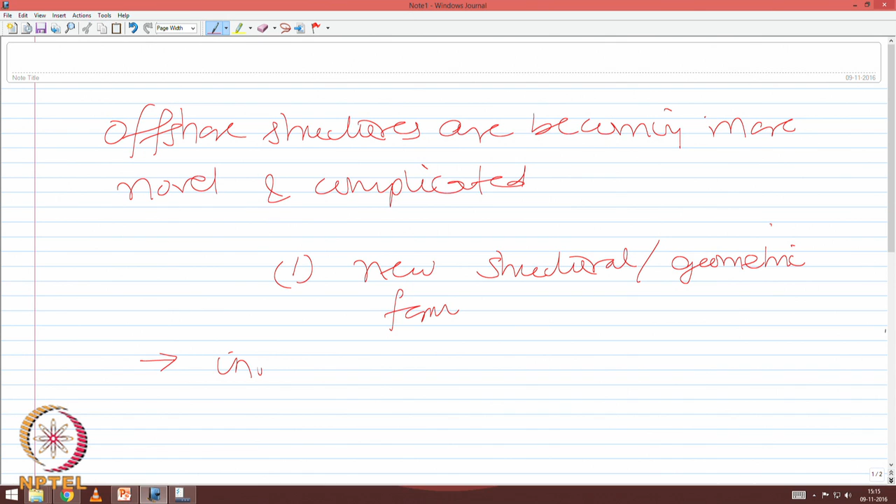One may ask, why should offshore structures have new and innovative geometric form? The answer is simple: innovative structural form is required to make it more adaptive to loads.

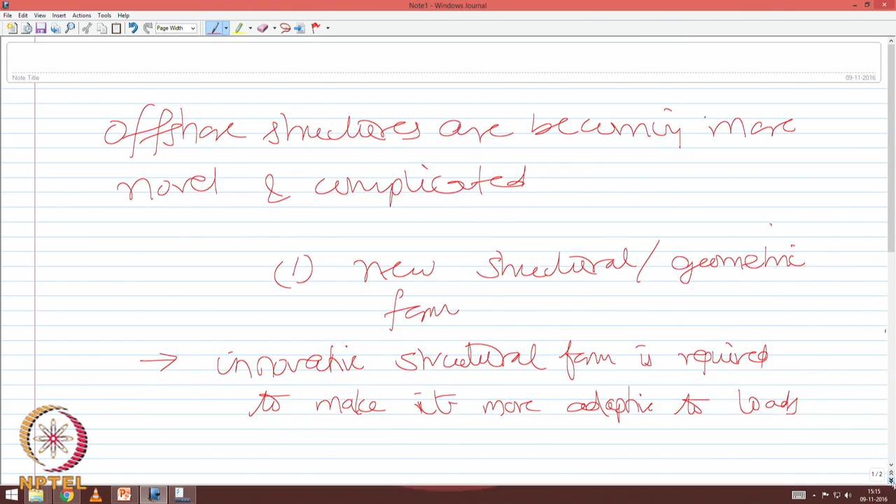The primary focus in the whole discussion is how to reduce the response of the given structural system under various environmental loads. So the primary objective of innovative structural form is to reduce the response under the environmental loads.

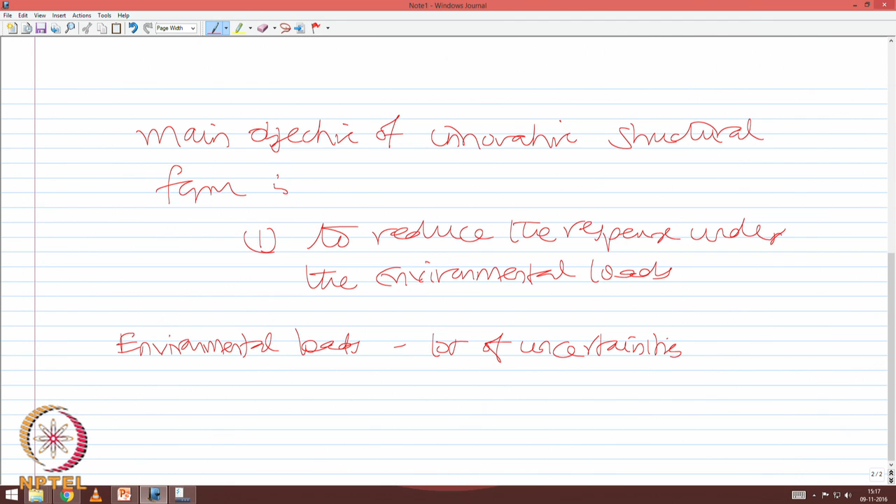However, if you look at the environmental loads in total, which we will be discussing in detail, they have lots of uncertainties, in the sense of uncertainty in estimating them, and uncertainty in estimating their direction of approach.

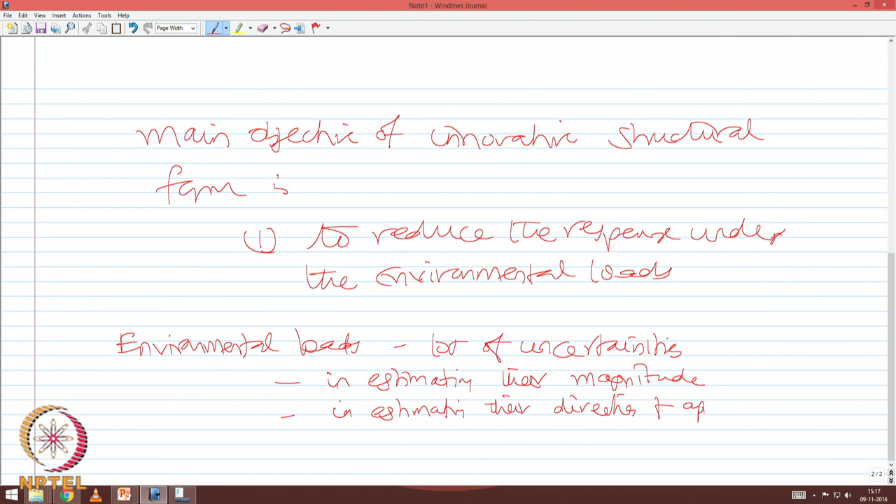Most importantly, the return period of these loads makes them very complex.

However, we are not interested in explaining the complexities of conventional environmental loads like wave load, wind load, ice load, etc. There are different courses and materials available in the literature which explain these complexities to readers.

So I do not call these forces special loads. Therefore, in this course we will not discuss much about wave load, wind load, etc. in detail. However, we will talk about special loads encountering offshore structures which are not otherwise discussed in conventional literature.

One may ask, what would be the result of encountering special loads on offshore structures? When special loads are encountered on offshore structures, it leaves a complex behavior in their response.

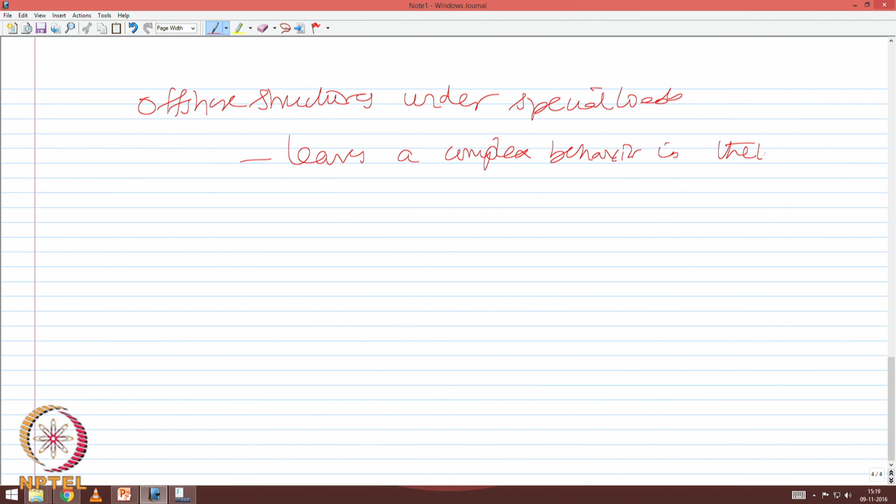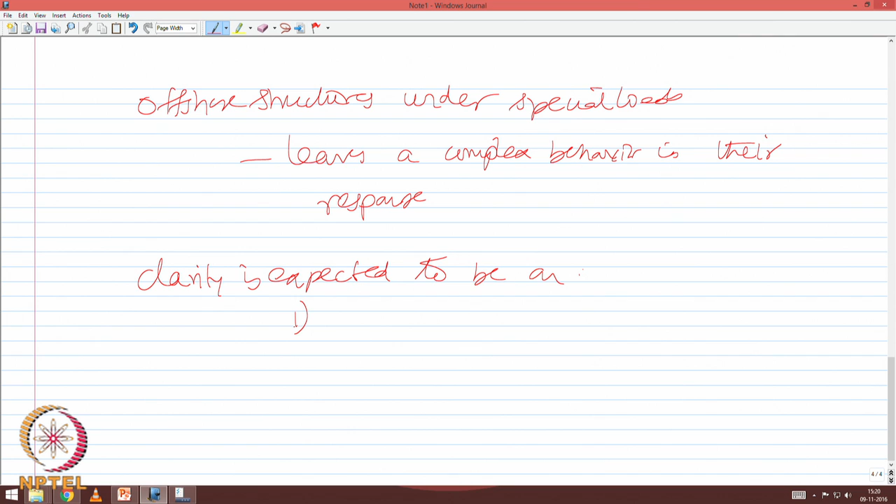Therefore, this course is expected to improve the clarity of understanding in estimating not only these special loads, but also the response behavior of offshore structures under them. So clarity is expected on: 1, estimating these special loads; 2, understanding the response behavior of offshore structures under these special loads.

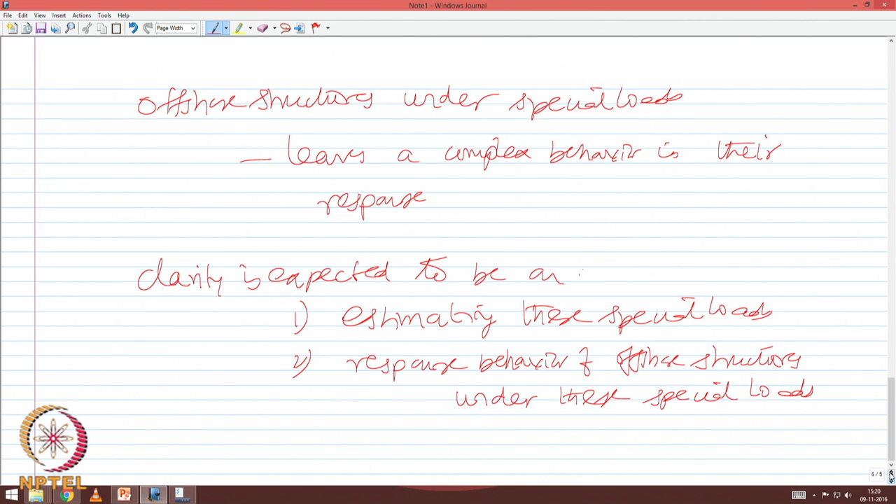Let us see what would be the course objective for this course titled Offshore Structures under Special Loads including Fire Resistance. So what are going to be the objectives of this course?

We all agree that offshore structures are unique in nature. The uniqueness comes from two sources: 1, the geometric form; 2, their special functions.

Sometimes offshore structures are also designed for special categories of functional operations. We will talk about these new generation offshore platforms, whereas the functional application is completely redefined depending upon present requirements. So offshore structures are unique from two sources: innovative geometric form and special functional operations.

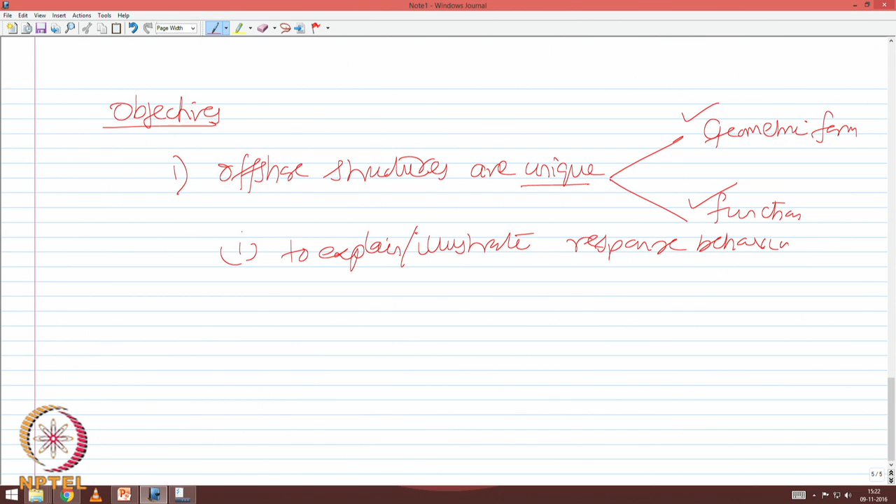Therefore, the main objective of this course should be to explain or illustrate the response behavior of offshore structures under these special loads. While doing so, we will give special focus to fire resistance design.

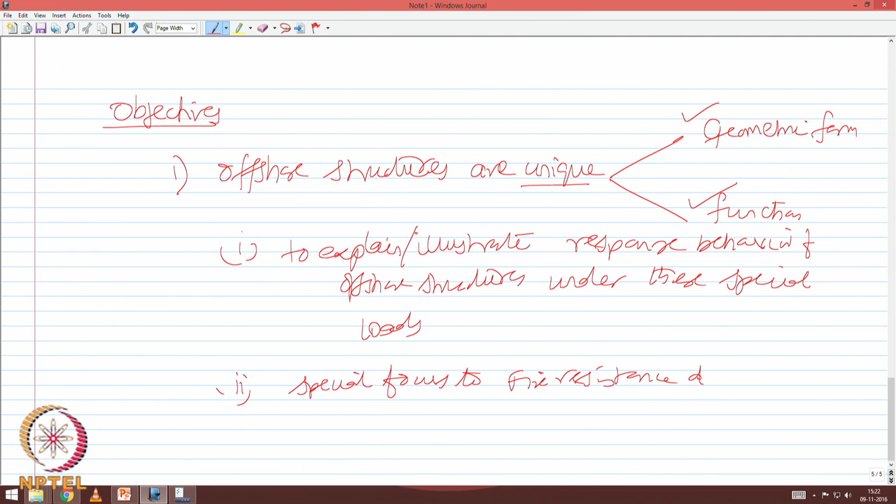One may ask why fire resistance design is given special focus in offshore structures. Looking at the history of offshore accidents, which are highly unintentional but highly severe in consequence, one is interested to know what special care must be used to select material with good fire resistance, to mathematically model fire on this material, and to understand the consequence of spread of fire and explosion in terms of asset management of offshore structures. This could have been a primary focus about 10 years back, but even now it is very important that fire resistant design is inevitable for offshore structures, because the asset involved in damages caused by fire is huge in scale.

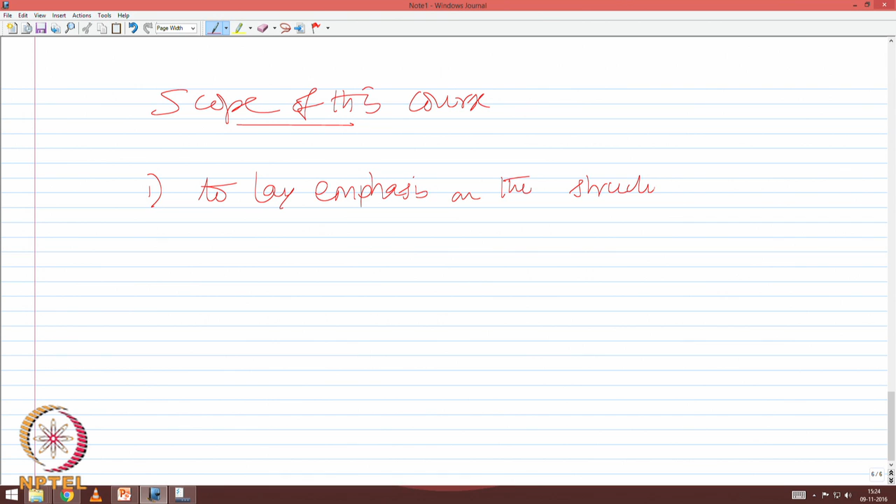The scope of this present course is to lay emphasis on the structural action of offshore structures under these special loads.

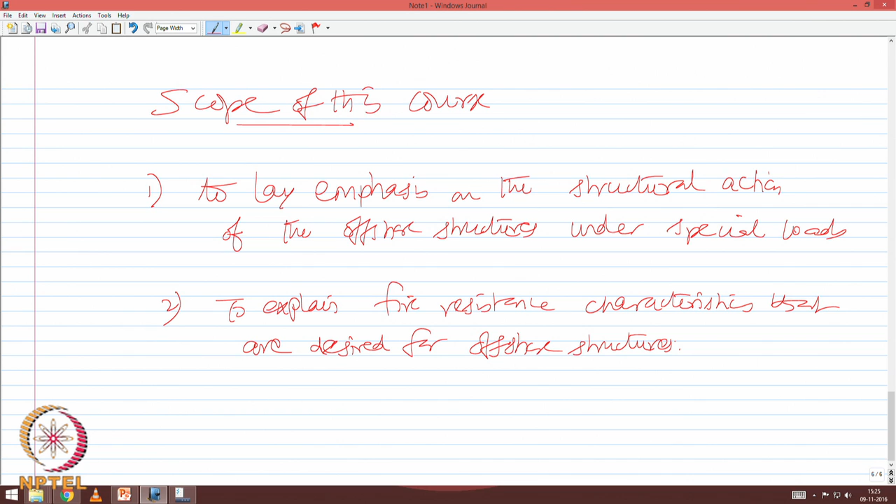The second scope should be to explain the fire resistance characteristics that are desired for offshore structures, because there are unique challenges in design when these structures are subjected to fire.

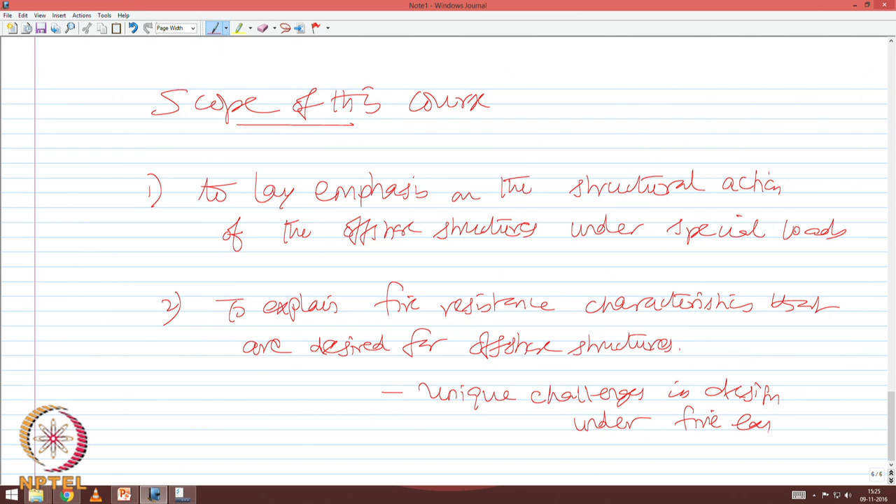Let us quickly see broadly the course content, how we are going to do this course. The course will be taught in 4 modules. Each module will have tutorials and exercises for self learning.

There will also be an online discussion forum which will help you, which will be interactive to clear doubts on the content of the course. Reference materials useful for parallel understanding will also be made available.

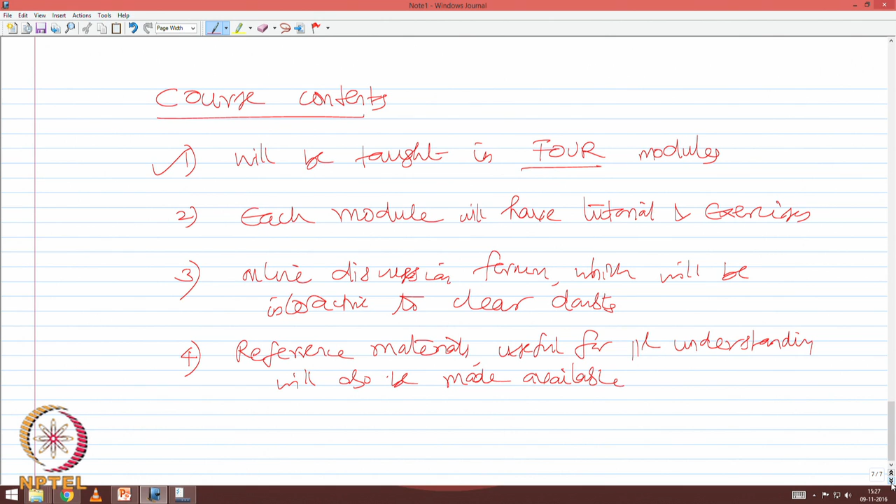Having said this, let us see what these 4 modules are and what we will cover in them. Module 1, we will talk about introduction. In introduction, we will discuss the novelty of offshore structures.

We will talk about various environmental loads in general and special loads in particular, maybe in detail.

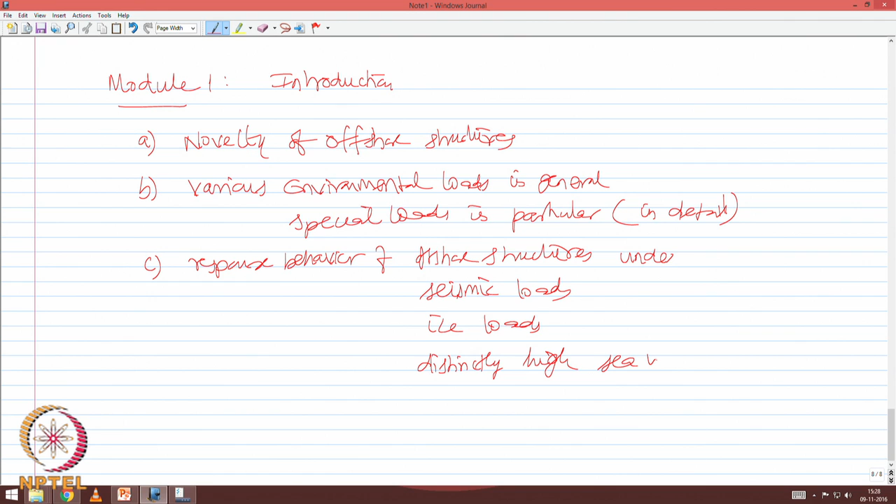We will talk about response behavior of offshore structures under seismic loads, under ice loads, under distinctly high sea waves, under blast loads, under shock and impact loads, and we will introduce fire resistance.

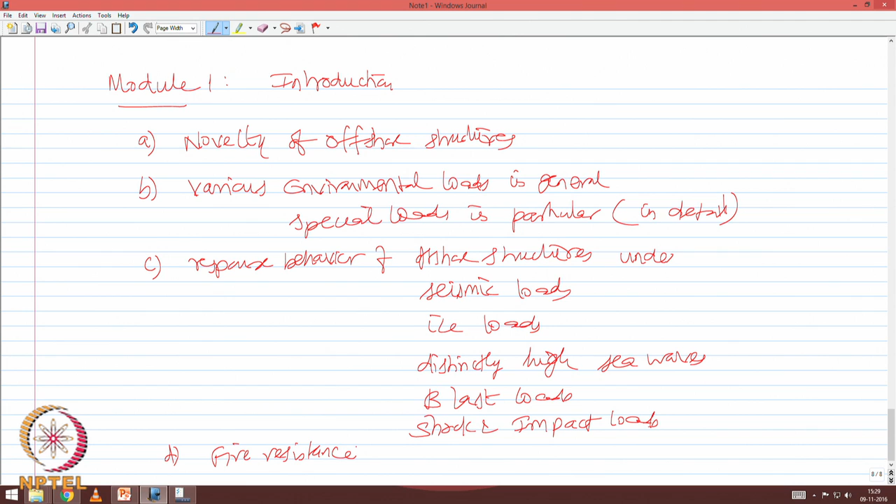That is what we will see in the first module. In the second module, we will discuss about fire safety. In this, we will have an overview about fire safety.

Where we will talk about fire and explosion release models, fire triangle. We will talk about characteristics of fire, we will talk about modeling fire damage and control.

We will talk about pre flashover fire. We will also talk about post flashover fire. Then we will talk about something called design fire in the second module.

After understanding this, we will move on to third module, where we will lay emphasis on fire resistance. There we will discuss about overview of fire resistance.

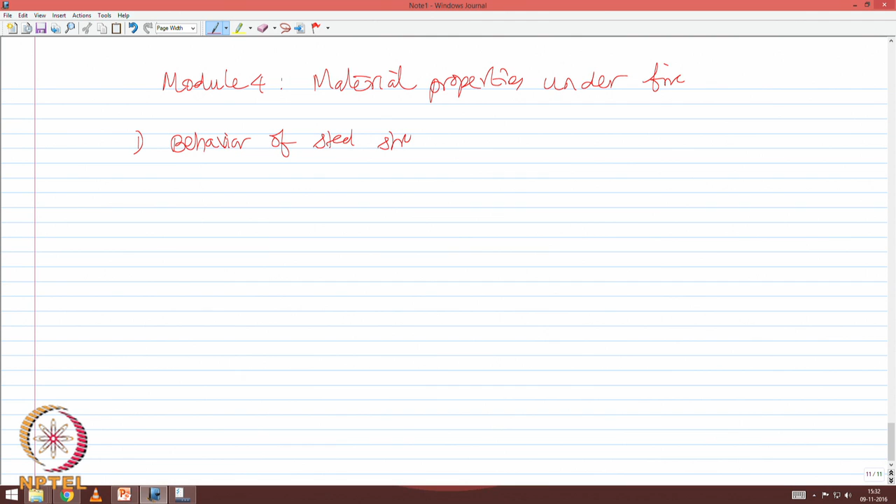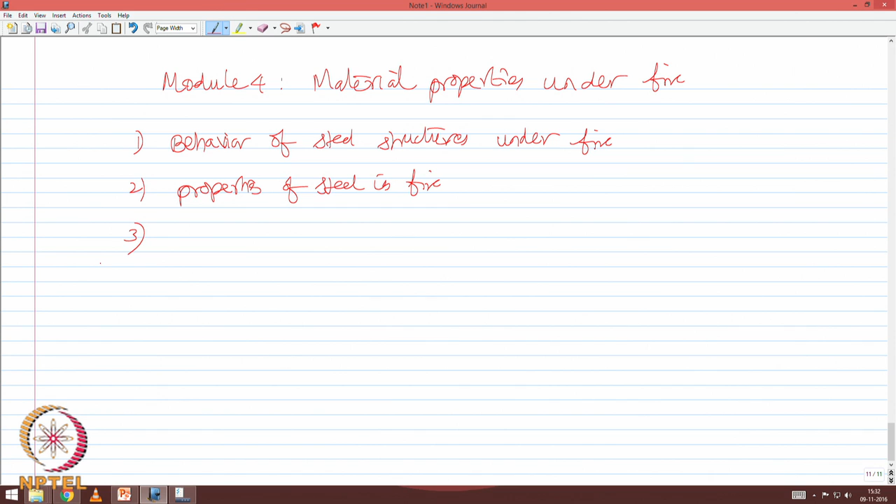Having said this, we will move on to fourth module, where we talk about material properties under fire. We will talk about behavior of steel structures under fire, we will talk about properties of steel in fire, we will talk about design of steel members exposed to fire.

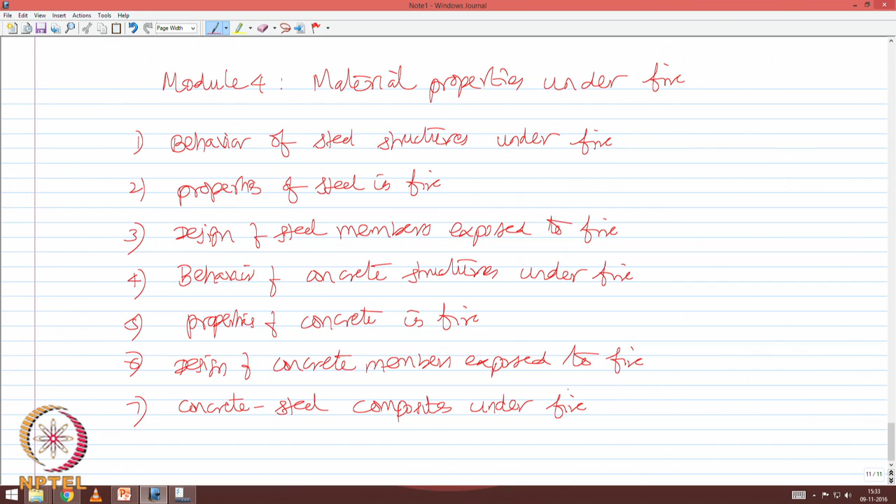We will talk about behavior of concrete structures under fire, we will talk about properties of concrete in fire, we will talk about design of concrete members exposed to fire, and finally we will talk about concrete steel composites under fire. So, the course will be now taught in 4 different modules, as you saw in the previous slides.

The course will circumscribe around various textbooks. You can look at the screen now. There are various textbooks as Eurocode 3 2005, Malhotra 1982, Malhotra 1987, fire safety in buildings. Then the textbooks authored by myself with different co-authors, which talk about basics on offshore structures, the advancements in design methodologies, then the reliability and risk assessment involved in offshore structures, and of course health, safety and environmental management in offshore and petroleum engineering program as well, which are all discussed as textbooks in the given system.

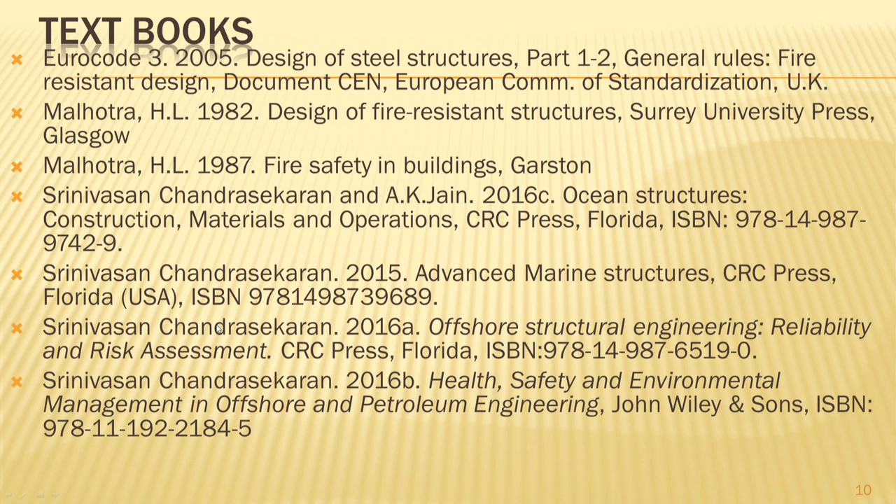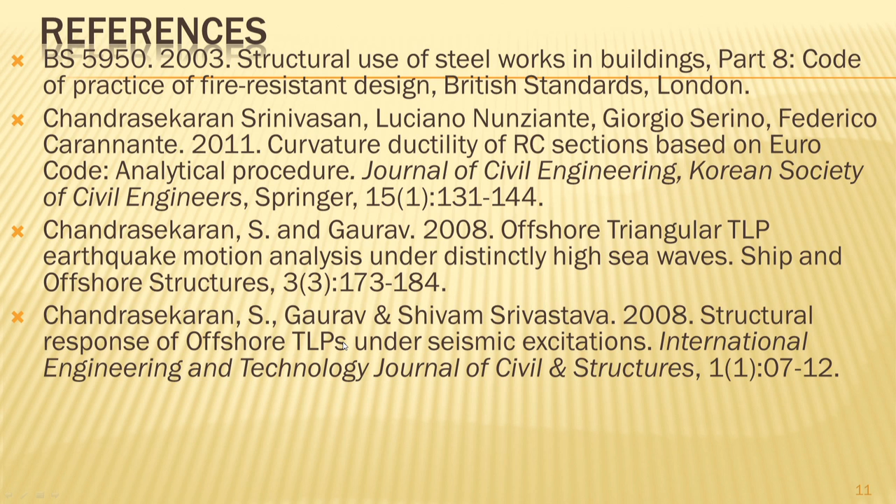For additional reading, you also have references taken from different journal papers, BS 5950 structural use of steel works in buildings, paper authored by Srinivasan and Chandrasekaran et al., which talks about curvature ductility of RC sections based on Eurocode, behavior of triangular tension leg platforms under distinctly high sea waves in earthquake motion, also paper on structural response of offshore TLP under seismic excitation.

So, we are now interested to extend our discussion on understanding the novelty in offshore structures. We already said that offshore structures are constructed for different functional requirements.

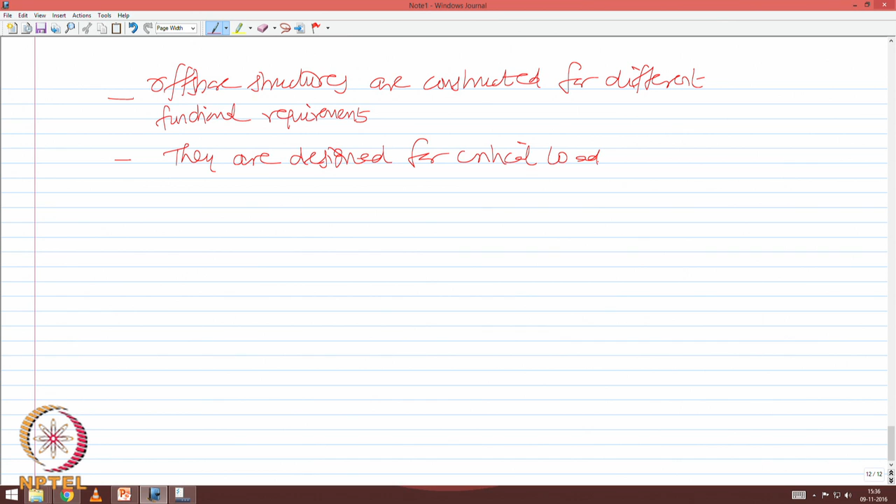Although they are designed for critical loads, or I should say for critical combination of loads, but there are some special issues.

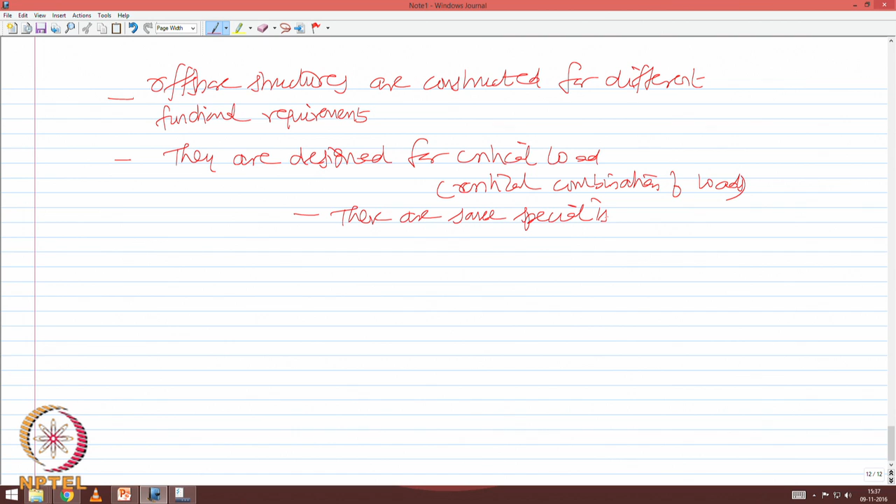Let us see what are they. What are the special issues? The special issues which make them functionally unique are the following: although the service life is exceeded, they are expected to serve.

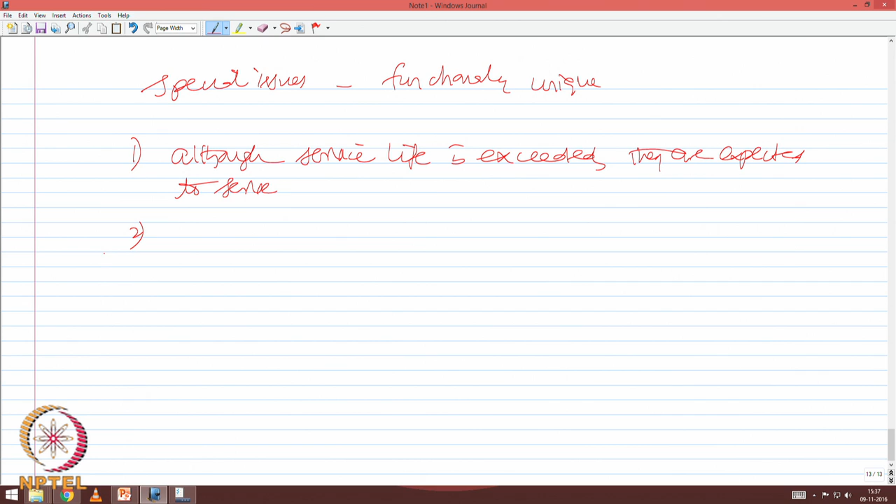Secondly, as they are functionally very important, frequent intervention for repair and maintenance is not advisable.

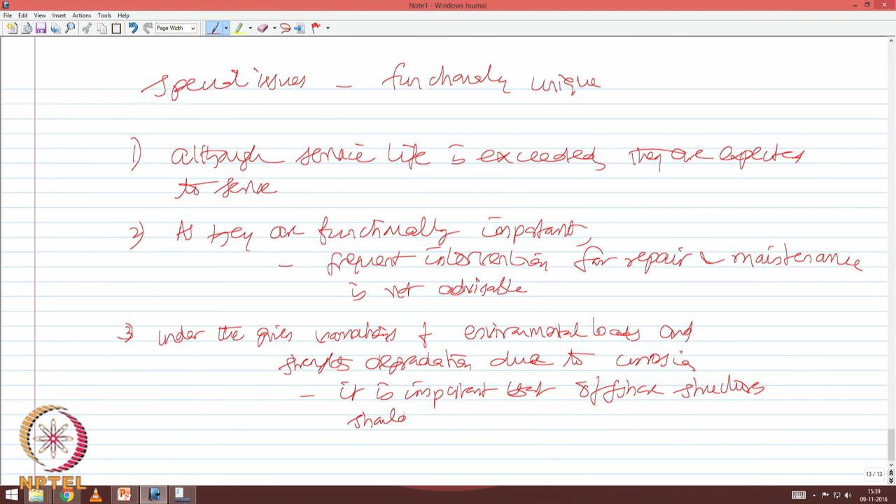Under the given variations of environmental loads and strength degradation due to corrosion, it is important that offshore structures should be strengthened to enhance the service life.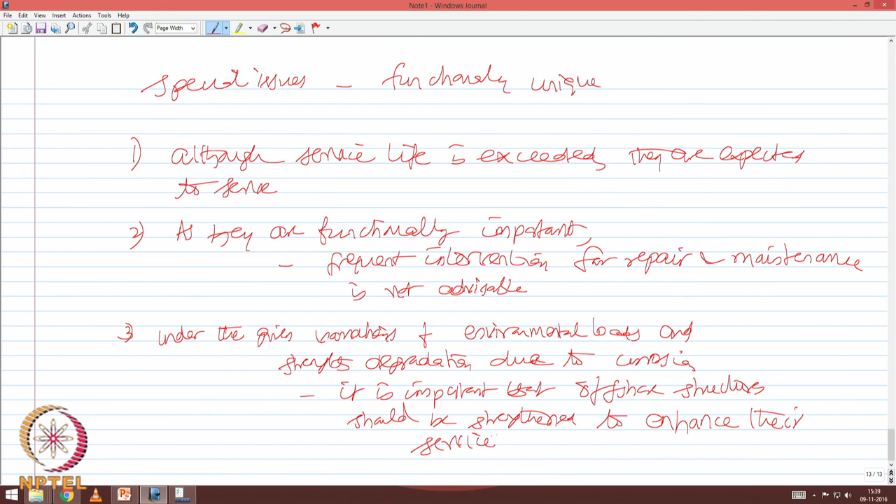More interestingly, no special code regulations are available to carry out repair of offshore structures.

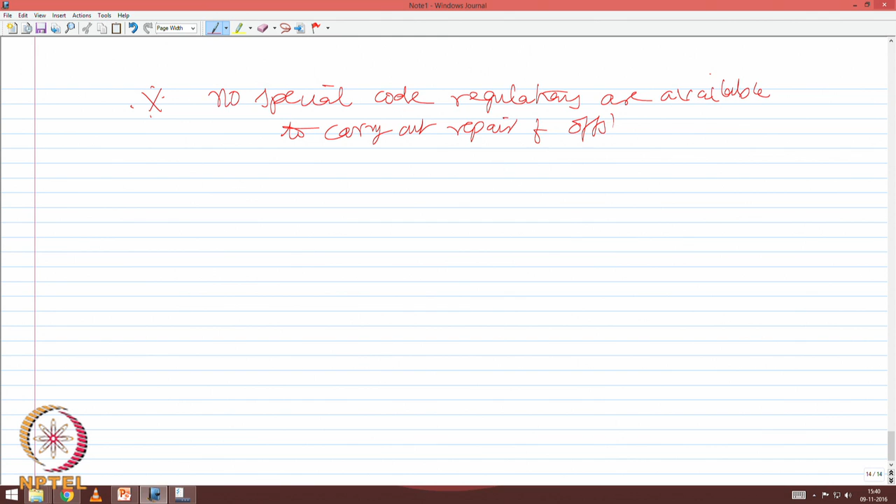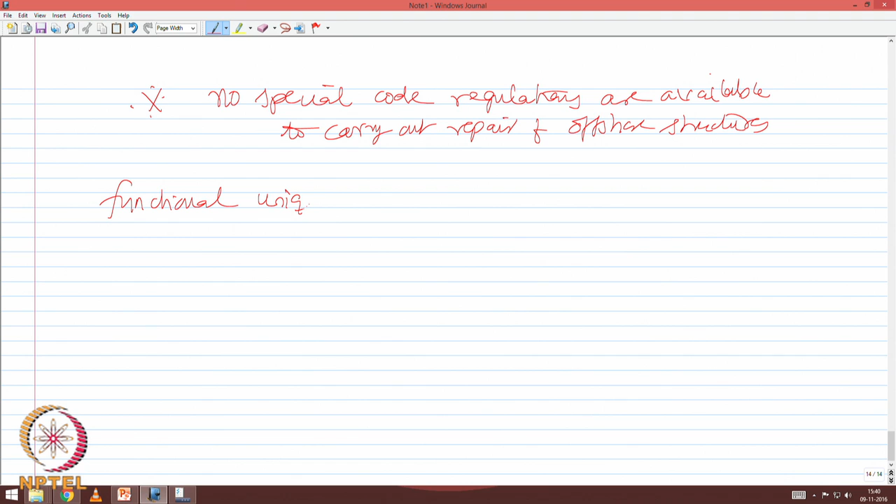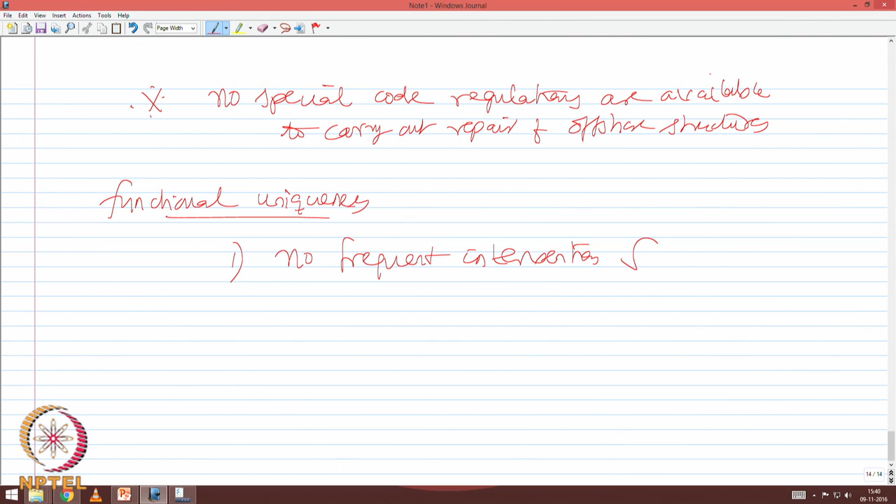So, we have very important points of functional speciality, let us say functional uniqueness. One, no frequent intervention for repair. Strengthening is mandatory.

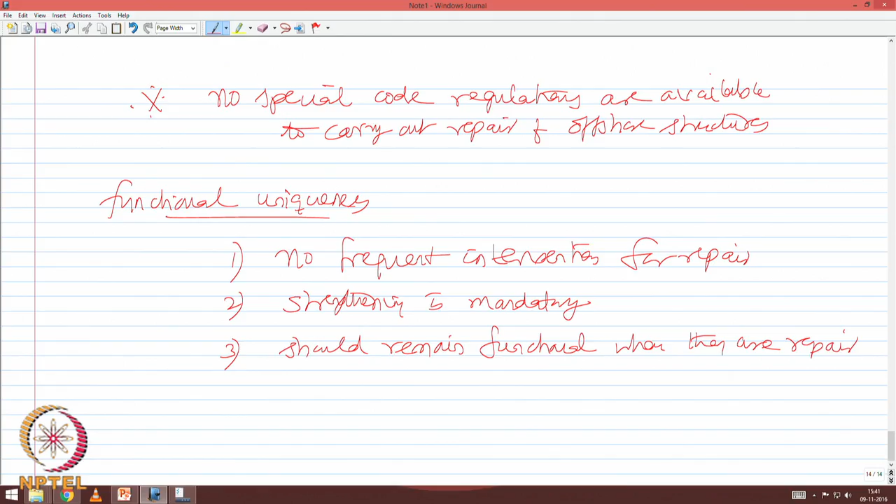Most importantly, the structures should remain functional when they are repaired. That is a very classical problem we have in offshore structures. You cannot shut down the offshore platform for the sake of repairing the platform. It is expected that the functional requirements by and large are not affected while the repair or strengthening process in a platform is being carried out.

So, there will be a functional isolation of the platform for a particular sector or portion of the members of the platform, which will be repaired or strengthened while the remaining part of the platform has to remain functional under the given environmental loads.

In terms of special challenges, further continuing, design of offshore structures should also be cost effective. It means the chosen structural form should be effective in dispersing or transmitting the load effectively.

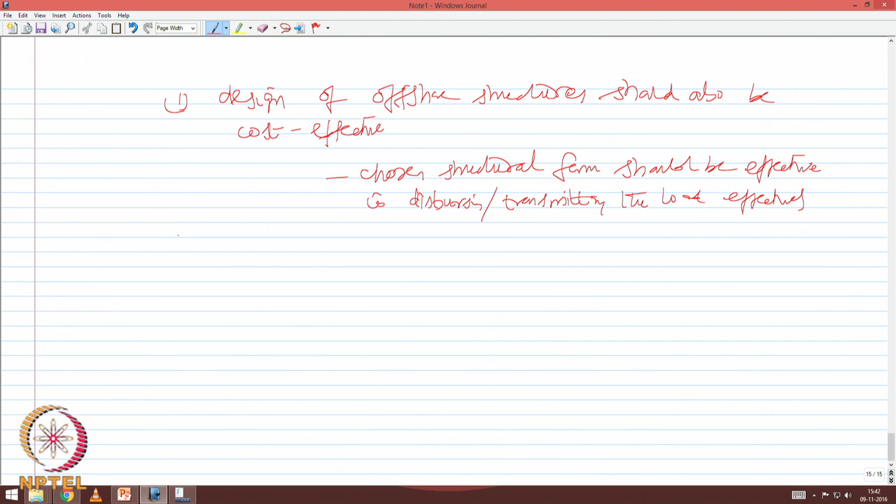Even the structural repair under damages caused by environmental loads should be cost effective and should provide a long term solution. That is very important. You cannot have an interim solution for repair. That is not advisable, because frequent intervention of the structure is not desirable.

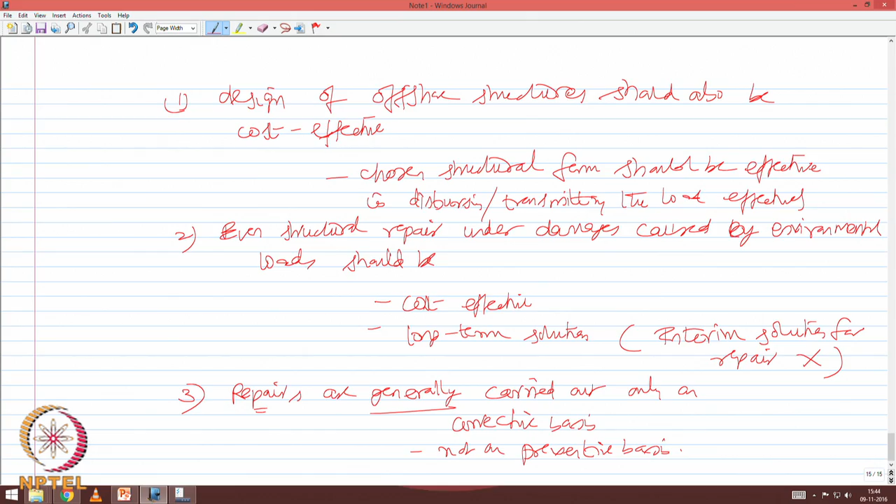Most critically, repairs are generally carried out only on corrective basis and not on preventive basis. So what does it mean? It means that repair is generally attempted only when the platform actually needs a repair or the damage is of a very severe order. So, the time availability to do detailed analysis, diagnosis and concluding certain methods of repair becomes very scarce, and the solutions provided should be also long term and cost effective.

Under these circumstances, offshore structures therefore can be classified as unique and novel. Hence, offshore structures are classified as unique and novel, both by design and by functional requirements.

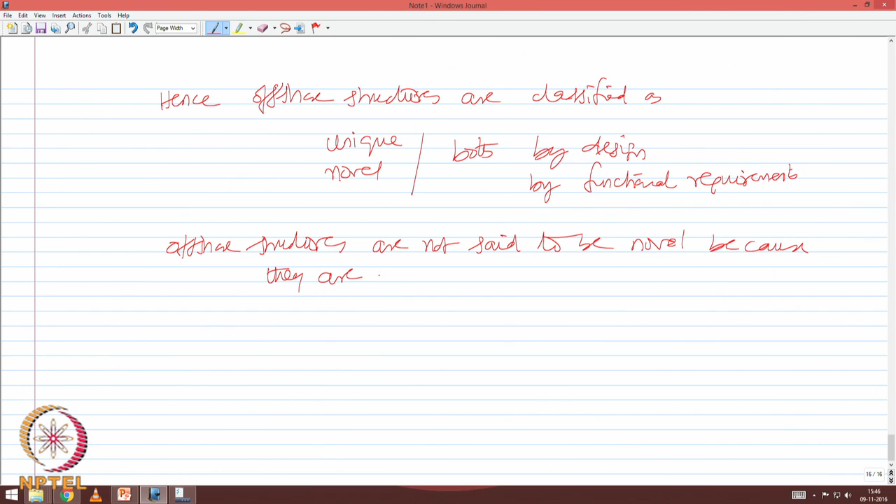Please understand, the novelty of the classification does not come because of the loads. So I must say here very clearly, offshore structures are not said to be novel because they are acted upon by special loads.

The novelty does not come from the source of loading, it comes from the source of geometry and functional requirement. That is a very important and very interesting statement which we have got to understand.

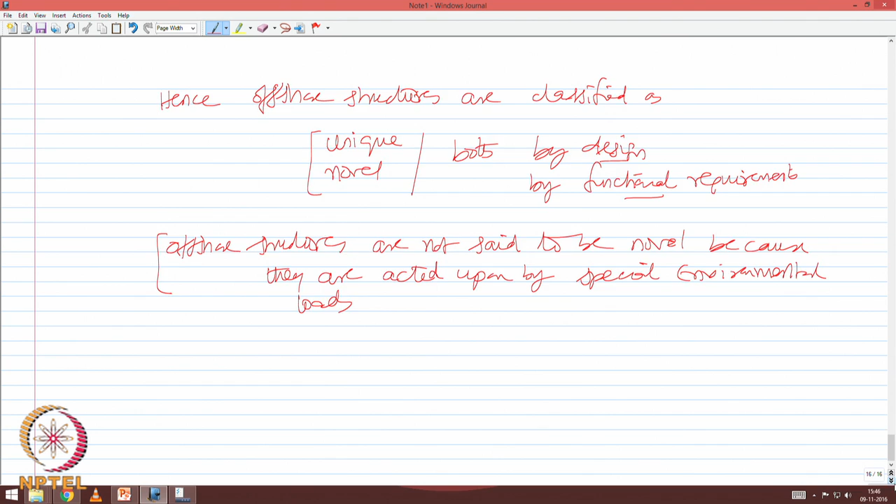Now, let us ask a question. When we are looking for a novelty with design and functional requirement, generally what factors are considered in arriving at this novel geometry? So, let us talk about factors that are considered during design.

The structural geometry which is proposed should be simple and stable. That is the first requirement we have.

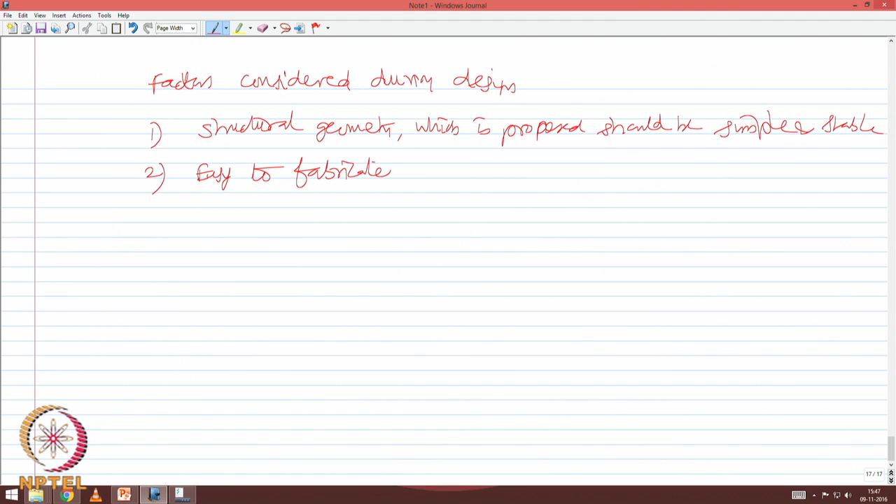The second requirement could be it should be easy to fabricate, install, and most importantly decommissioning.

The third factor could be I must encounter with a low capital investment which we call as capex. I should always enable the design for early start of production. It means the structural form should be installable in a very short period of time, so that the production of the well through the platform drilling can happen as early as possible, which can result in high return on investment, which we call ROI. Because the investment capital in construction of an offshore structure is phenomenally high. So, one always expects to have a good return on investment with an uninterrupted production.

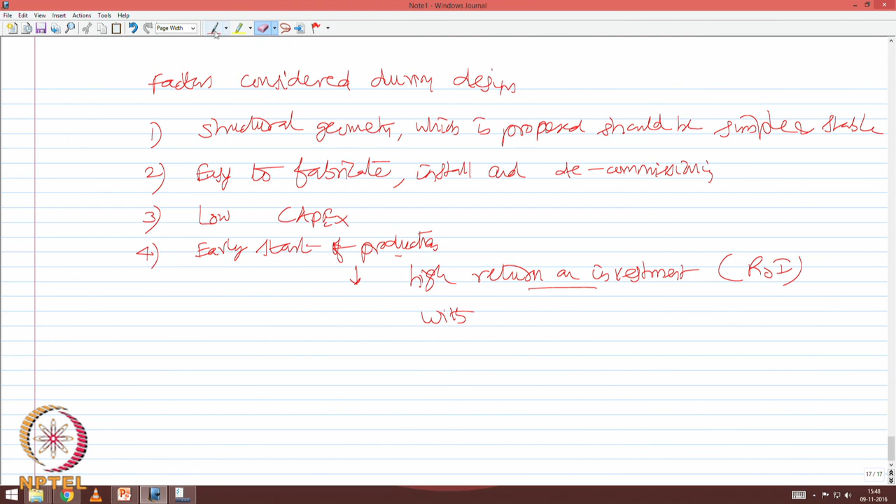So, therefore, under any kinds of loads encountering offshore structure, it is important that we must realize as a designer, as a constructor or an offshore engineer, we should not allow the downtime of the platform to happen or the shutdown of the platform to happen because of its non-resistance to any special kind of loads encountering them. It is therefore important to understand the response of the structure and therefore then select an appropriate geometry to withstand the encountered environmental loads acting on the system.

Rather, this is one of the important requirements to choose a comfortable and successful geometry, is an important requirement in front end engineering design, which we call shortly as FEED.

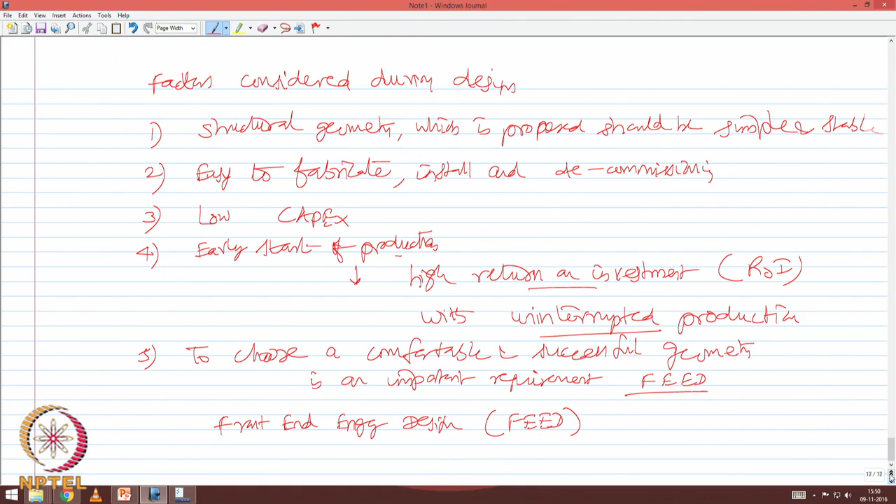Interestingly, the whole discussion can be successful if we are able to understand different existing structural forms of offshore platforms, their merits and demerits in encountering the environmental loads, the necessity for new generation offshore platforms, the special kind of members and connections which are enabling them to alleviate the environmental loads effectively, and what are those special loads which can cause serious damage to these platforms when they are encountered even under a rare phenomena.

So, the argument here is even under rare situation, to put it more scientifically, even the frequency of occurrence is very low, since the consequence of damage is very high, offshore structures generally have very high risk, because risk is actually a probability product of frequency of occurrence of an event multiplied by the consequence. So, one of them can be low, but still this is phenomenally high, therefore, offshore structures are under high risk. So, this risk factor of high value also makes offshore structures as unique.

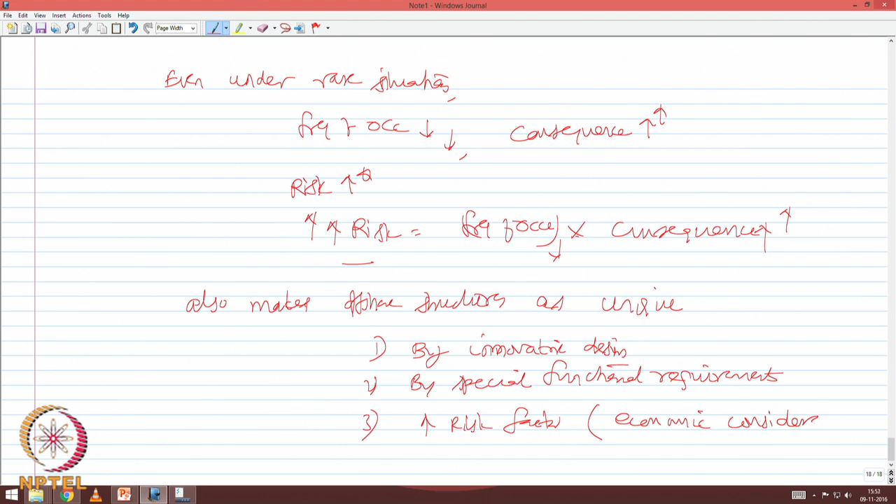So, friends, novelty or uniqueness in offshore structures arise from many factors. The first factor is by innovative design, by special functional requirements, and thirdly, high risk factor. The moment I say risk, it also includes the economic considerations, because we all agree risk is a term related to finance management as well.

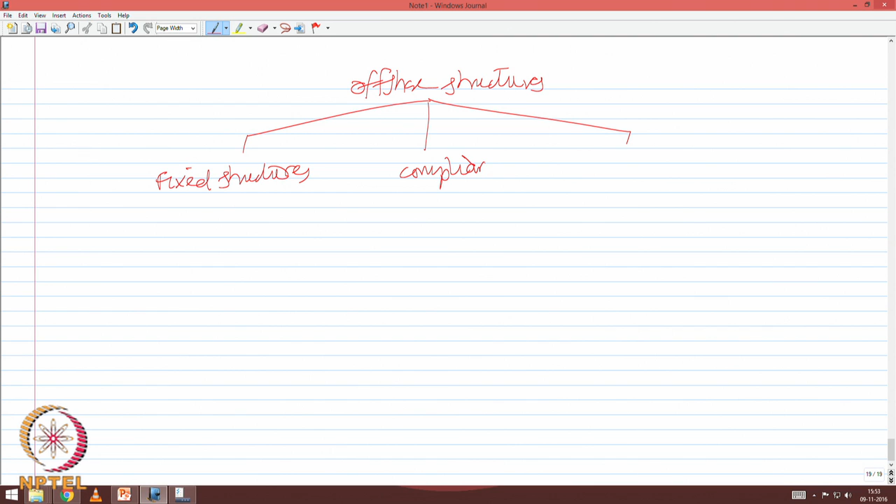Let us quickly see how offshore structures are categorized, how are they classified. So, offshore structures can be classified essentially in three forms. The first could be fixed structures, the next could be compliant structures, the third could be floating structures. As an engineering graduate or as an experienced professional executive in engineering, you will be able to easily understand the varied difference between these classification, starting from the geometry required for a fixed system to that of completely floating. So, one can easily understand here the classification essentially deals with the support system on which the platform is resting.

So, fixed structures can be examples of jacket structures, otherwise called as template structures, the second could be GBS, which we call as gravity based structures.

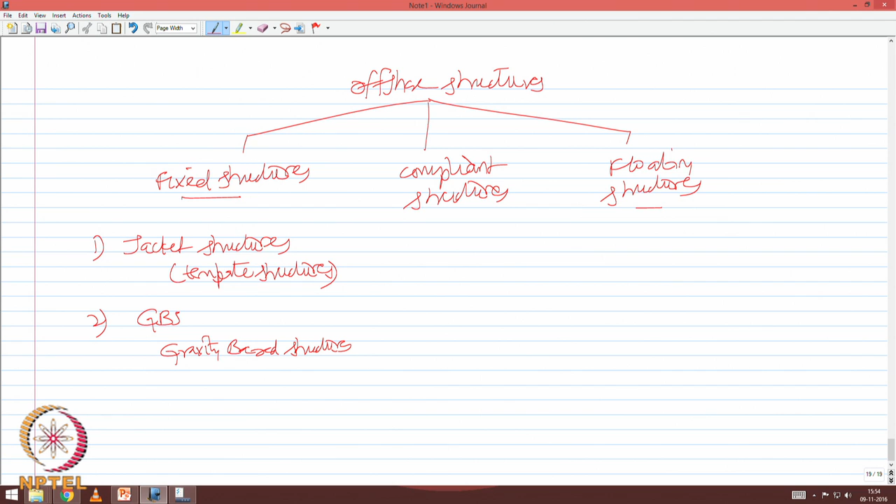Compliant structures can be guyed towers, articulated towers, tension leg platforms, and spar platforms.

Floating structures could be semi-submersibles, floating production units, floating storage and offloading units, floating storage, offloading and production systems. Which is FPSO, floating, production, storage and offloading.

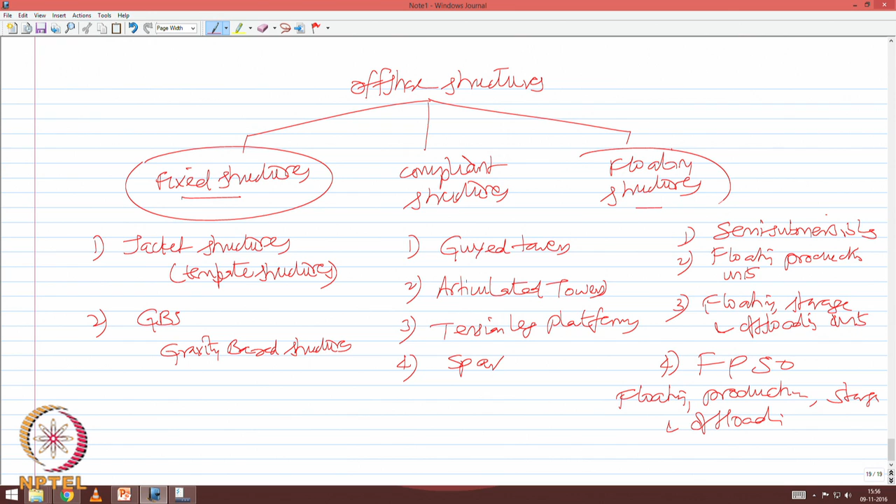So, friends, one can very easily see from this comprehensive slide that support systems essentially make the difference in classifying offshore structures, which are unique by design, by functional requirements, by having very high risk factors.

So, in the next lecture we will discuss about some brief details, advantages and disadvantages of different classification of these structures. When we move on from one system to another, let us talk about the demerits of this and how these demerits in design are overcome in design of these systems and further overcome design of these systems. Even at this system design, what are those lacunas? We will talk about this in the next lecture.

So, in this lecture the summary is very simple. Offshore structures are unique in nature, they are novel by design, functional requirements and high risk factors, and they are generally encountered by various environmental loads. They are not called special loads, or the novelty of the offshore structures does not come because of environmental loads, but the novelty arises from the design. So, offshore structures in general are form dominated design and not function dominated design. Amongst these three categories, you will see that form dominated design is a majority in terms of implication in the novelty. So, it is form dominant and less function dominant.